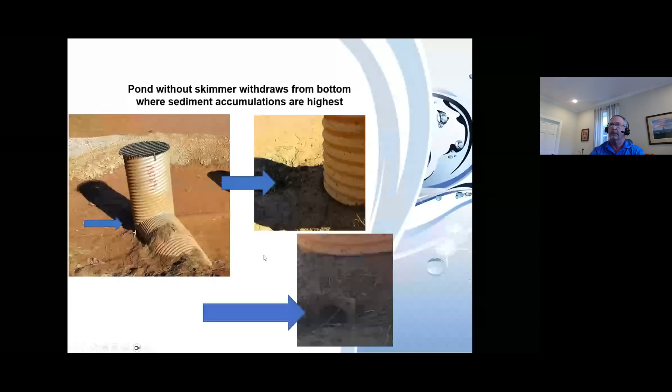Skimmers came around, they've been around probably 20, maybe 25 years now, depending on location. The idea is that it floats, it drains the pond from the top down, releases water from near the surface where the water's cleaner. It's not clean water by any means, but it is cleaner, and it gives more time for sediment to settle out and stay in the pond.

The Marlee Float Skimmer, our product, is a little different from some other products. We don't take water directly off the surface, we take it from just below the surface. The main benefit is that any floating trash or debris, even if you had an oil or diesel spill during construction that got into the pond, doesn't get discharged through the skimmer. It actually stays in the basin.

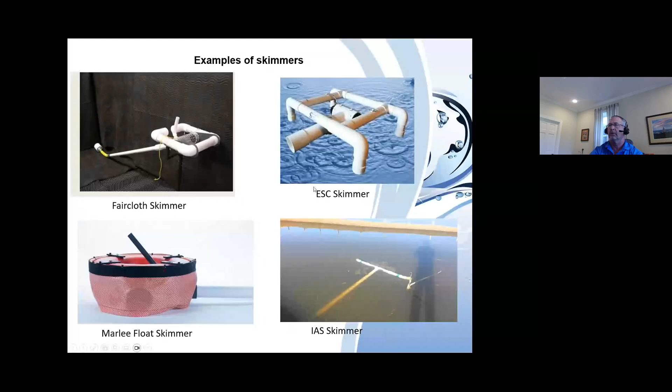There are a variety of skimmers on the market. The Faircloth skimmer kind of got this started. Mr. Faircloth out of North Carolina invented this maybe 25 to 30 years ago, I think, and it's really become one of the more common products. You have the Erosion Supply Company skimmer, the IAS skimmer, and then obviously the Marlee Float, which looks a little different than the other guys.

So there are three fundamentals on sediment basin design, just to keep this simple. Number one is basin volume. The basin volume is based on the area flowing to the basin, and requirements do differ from area to area. What we see in a lot of states is a standard of either 1,800 cubic feet or 3,600 cubic feet per acre flowing to the basin.

Some areas also require basins to have a permanent pool or sediment storage volume that is below the invert of the skimmer. The important thing we really try to harp on is to use the required volume, not the actual volume, when you size your skimmer. The required volume is often much less than the actual volume of the pond, especially if that pond is going to be your permanent detention pond later.

Number two is dewatering time. Sediment basins work by simply allowing time for sediment to settle to the bottom. Depending on your soil type and conditions, that may vary as far as what you need. What we see as kind of the general standard is 2 to 5 days, or 48 to 120 hours, but again this varies state to state and even sometimes within MS4s within the state.

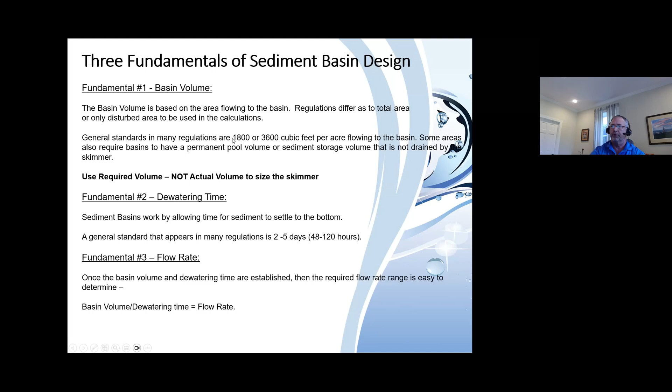Once you've got those two, you want to determine your flow rate. So fundamental number three is determining the flow rate for the basin - simply the basin volume divided by the dewatering time gives you that flow rate. Now, since dewatering time is typically a range, that flow rate has a range as well. We recommend that engineering consultants, when establishing that flow rate and going through the review, establish that range, so you're not trying to hit an exact time.

Skimmers aren't super complicated, and a couple hours one way or the other is probably not going to make a big impact on the amount of sediment being trapped. So we recommend using that range of time when you specify it.

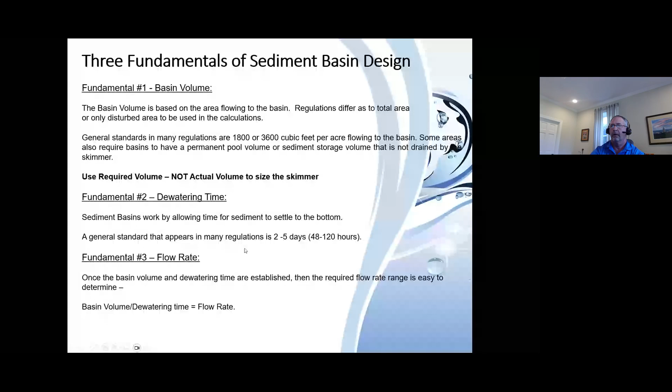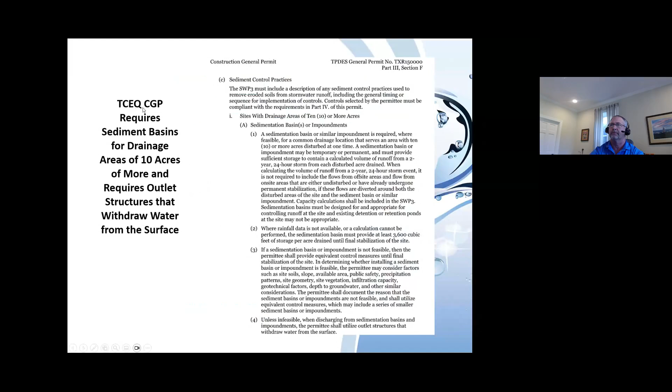I'm going to go through a couple of state standards just to give you an idea of how they vary. Texas is one state we're now seeing coming on, where skimmers are just now starting to be required. The Texas Construction General Permit, from the State Environmental Quality Agency, requires sediment basins for drainage areas of 10 acres or more, and they do require outlets that withdraw from the surface.

This is from the Construction General Permit - again, must provide sufficient storage to include a calculated volume. They say you can either do a 2-year, 24-hour storm and calculate that based on the rainfall for your area, or provide at least 3,600 cubic feet of storage per acre drained. And then most CGPs include language like this: unless infeasible, when discharging from sediment basins and impoundments, utilize outlet structures that withdraw water from the surface, i.e. skimmers.

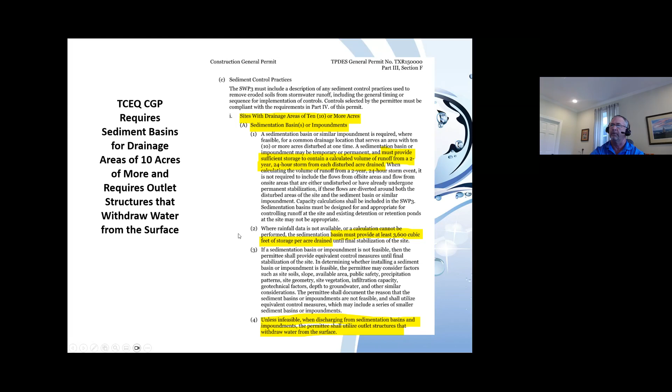Examples of infeasible - really the only one we've seen is frozen conditions. So if you're in a state or area with significant freezing, skimmers may not be the best choice during that time. What we recommend is to use the skimmer most of the time and maybe have an alternate outlet, like a perforated riser that you can cut on and off with a valve, to address those frozen conditions.

Typically they'll have guidance on sediment basins. In Texas there's an ISWM technical manual that goes into much more detail about all the key requirements for sediment basins, and typically has some diagrams and charts to show you what they want in that particular area. Another example is Alabama - Alabama gets a little more detailed than Texas.

In Alabama, they have 2 different handbooks for erosion control, sediment control, and stormwater management. Combined, they're the Blue Book, Volume 1 and 2. Volume 1 has more of the plans and design practices. Volume 2 talks about installation, maintenance, and inspection for those practices.

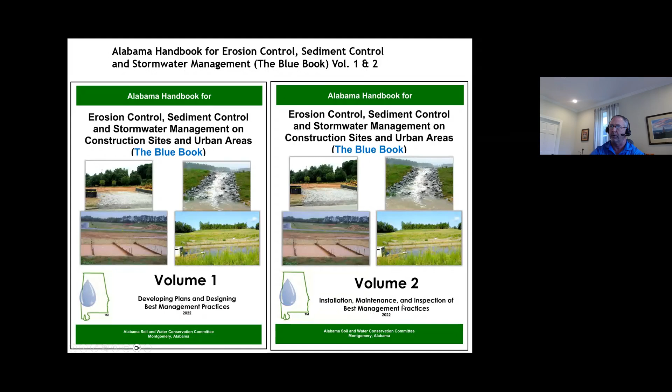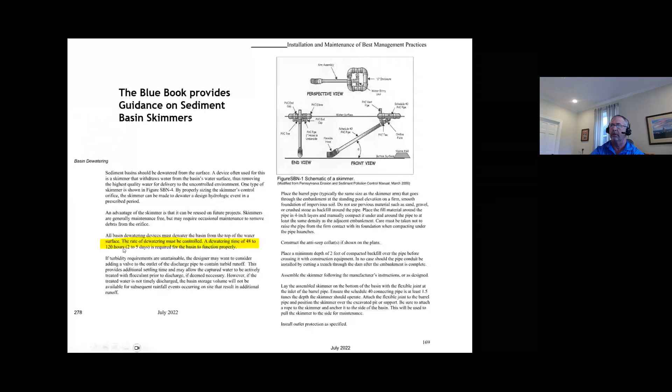In the Blue Book for Alabama, they give details on sediment basins and go through the key components. They go into detail about skimmers in the Blue Book. They do specify a dewatering time of 48 to 120 hours for the basin to function properly. And then they've got a little chart that tells you the other criteria.

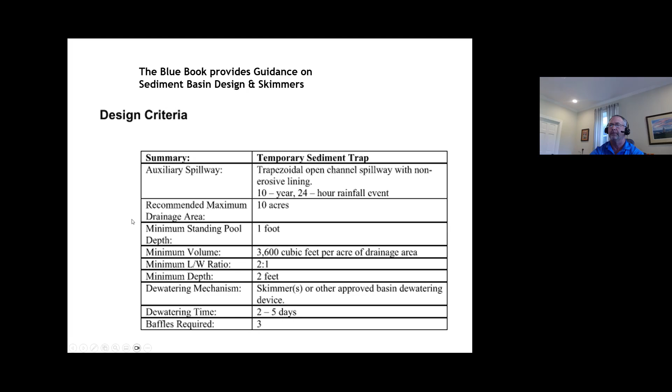I'm not going to go into those in detail, but it does spell it out for you as the design engineer what you need to do. One thing to point out, Alabama DOT does have an approved list of skimmers that they allow, and our skimmer is on that list. So if you are in Alabama, good to go to use us there.

This is kind of a quick chart just to give a summary and show how some states differ. In this case, I just picked Texas, North Carolina, and Alabama to use as examples. Texas, again, 2-year 24-hour storm or 3,600 cubic feet per acre.

North Carolina calls it out as 1,800 cubic feet per acre of disturbed area, so not total area. So they do recommend you try to divert undisturbed area around the basin. And then Alabama is also that 2-year 24-hour storm or 3,600 cubic feet per acre.

Some areas specify a surface area for the basin. Texas does not. North Carolina and Alabama use this formula of 325 square feet per CFS of the 10-year storm. They typically require the principal spillway to be their 2-year or 10-year design. That principal spillway is going to be your skimmer, and typically if you have a riser structure in there, the top of the riser would be included in that.

And then you typically would have an emergency spillway for larger storms. That's going to vary from the 25-year, 10-year, or in some cases 100-year storm. And then where skimmers are required, it also varies. Texas looks at big sites, 10 plus acres. North Carolina wants it for anything 1 acre or larger. Alabama says when necessary - so if you can't meet your trapping efficiency requirements with other means, then you need a sediment basin.

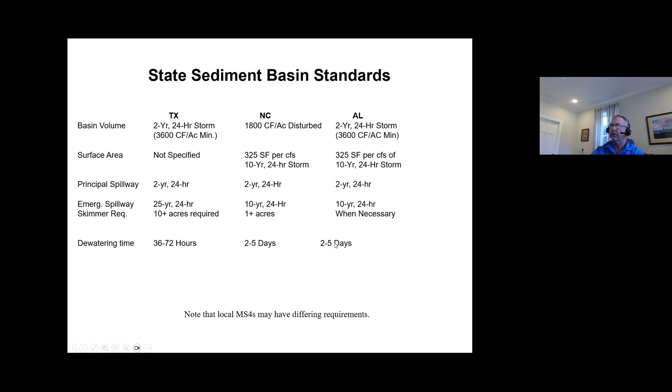And then the last one is dewatering time. Again, the 2 to 5 days is the most common standard we see. Texas says 36 to 72 hours.

One of the big things about skimmers that we like to educate folks on is that skimmers have long been assumed to be a constant head, constant flow dewatering device, which does make sense because they float and have pretty much the same head constantly in the basin. However, testing has shown that's not necessarily the case. This chart comes from a study done by TRI Environmental for Alabama.

The flow rates here go from 1 foot of depth to 4 feet, and they looked at 3 different 3-inch skimmers. They don't tell us the brands, but let's just say it's 3 different types of 3-inch skimmers. At 1 foot, 2 of the skimmers are pretty close, at 37 GPM. The other one is at 70, nearly double that flow rate. As they go up, all 3 skimmers have an increase in flow rate, roughly 25% from 1 foot to 4 feet. Again, 2 of them are pretty close, a little above or below 50 GPM, and the other one's about at 90.

So the main point here is if you just say 3-inch skimmer and you don't give more information, you may or may not get what you really intended. You may get one, if you intended to have the 90, you may get one that flows half. If you intended to have the 50, you may get one that flows double. So it's important to specify flow rate when you're specifying the skimmers for your basin.

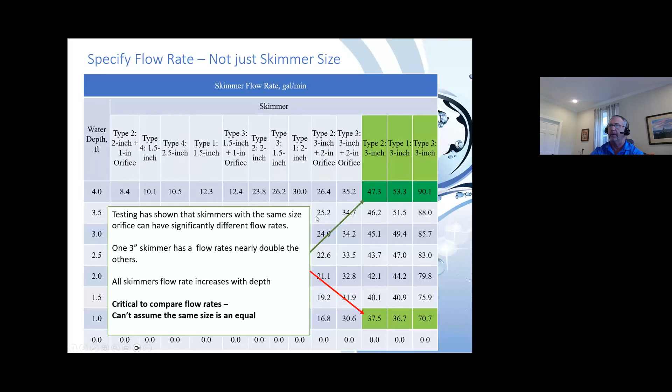We offer several tools on our website. They're pretty easy to download, but this is our basin design tool.

It lets you plug in your date, project name, engineering company, basin description. If you need any other information, you can put it in. So maybe it's like a phase 1 basin, and then you're going to convert it for phase 2 differently.

One thing we do is we have a check here for the required dewatering volume. You're going to look at that area to the basin, whatever acreage that is, times the cubic feet per acre required for that area. In this case, I'm using 1,800 cubic feet per acre. It's 7.5 acres, so our required volume is 13,500 cubic feet.

Now over here is where you're going to plug in your basin, and this tool does factor in that curve and the flow rates. First thing you're going to do is specify that range of time. Again, we've got 48 to 120 hours, so 2 to 5 days.

Pond depth is going to be the depth required to achieve that required dewatering volume. So if your sediment basin is going to be your detention pond later, you don't want to say it's 8 feet here because that's going to calculate the pond volume to be much larger than required. You want to use a depth that's required to achieve the required dewatering volume, then put in the top length and width and bottom length and width.

Now I realize there are very few, if any, square or rectangular basins out there. So use your engineering judgment, tweak those numbers so that the calculated pond volume is, we try to say, within 5%. Again, you're shooting for a 2 to 5 day range. You don't necessarily need to go back here and go 120.23 feet to try to get this thing to hit exactly that required.

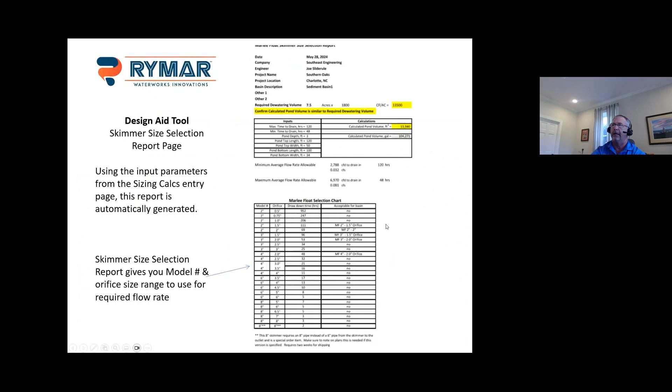When you do that, this tool will calculate for all of our skimmers with each orifice configuration what the flow is. Down at the bottom there's a skimmer report page tab. You click on it and it's going to take you to this nice neat 8.5 by 11. The top side of this is going to give you all your input information.

It's going to tell you the minimum flow rate based on the maximum time and the maximum flow rate based on the minimum time. So here's your flow rate range again that you're creating. It's got this check, so it highlights for the reviewer, hey, yes, our calculated pond volume is just slightly more than our required volume.

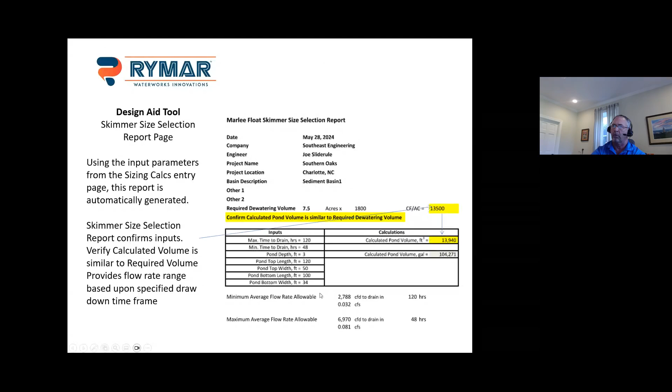And then because it is our tool, it's going to tell you the drawdown time for every one of our skimmers, and based on your range that you specified as acceptable, which skimmers are acceptable. We typically recommend that you shoot for that 2 to 3 day drain time, depending on your site.

If you've got really coarse soils, they're going to settle out quickly, maybe you want to lean more towards the 2 day. If it's really a lot of silts and clays that'll be suspended, maybe you go to 3, a little more. But in this case, you've got a variety, 5 different skimmer orifice combinations that would meet that spec.

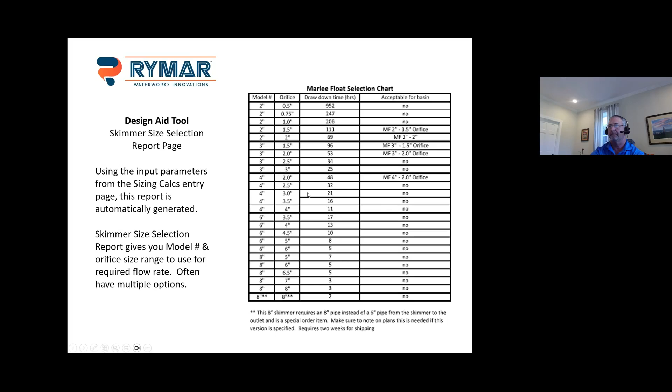We also have some basin details on our site. We have 4 different details for this. So we have details that have a riser structure, which would be more of a multi-use basin that's going to be converted to your pond later.

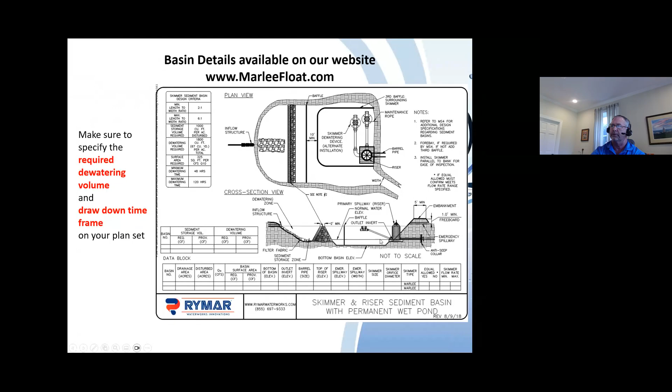We have versions with a wet setup, so they have a permanent pool here that's below the invert. And then we also have ones that are set up for temporary, so maybe it's just a barrel through the dam and a spillway, and it's going to come out as a temporary basin.

We have sediment design criteria over here. So length to width ratios are common. As far as requirements, minimum volume, you specify that, surface area if it's required. And here's where you set your minimum and maximum dewatering time of, again, we've got 2 to 5 days.

Down here at the bottom, we have a data block, and this would be for each specific basin. So you'd have a drainage area to it, disturbed area to it, the flow rate, again, your basin volume, the required and provided, basin surface area. Again, you want to make sure that your provided meets your required.

The outlet invert, pipe barrel size, that'd be your pipe through your dam, emergency spillway elevation here, and then skimmer size, skimmer orifice diameter, skimmer manufacturer. Is an equal allowed, yes or no? Most of the time that's going to be yes, but there may be some certain circumstances where you say no.

And then skimmer flow rate. Here again, you're establishing that minimum and maximum. Now, because skimmers are used in sediment basins, they're typically one of the first things to go in on a construction site. So if your contractor's getting started and says, hey, I've got this skimmer left over from a previous job, can I use it here on this basin? It's pretty quick to check whether that skimmer falls within the range of flow rate specified. So hopefully that's a shop drawing review and not a full scale resubmit through the permitting process, because you probably don't have time for that in most cases.

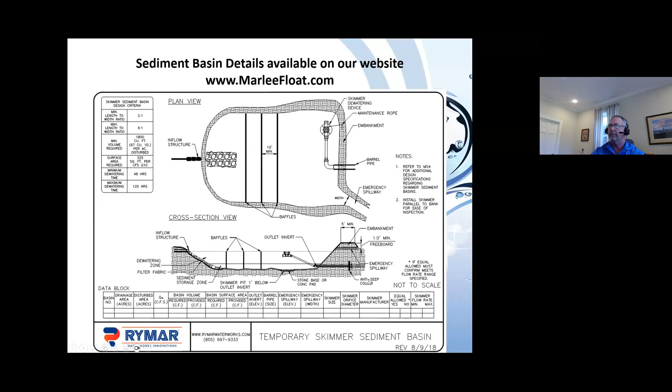We also provide details of our skimmer. What we have here is just a typical detail. One thing to point out about ours is we have this orifice plate. Some skimmers come with a disc that you cut to within a tenth of an inch or so to hit a precise flow rate. Our design is a little different. We provide standard orifice sizes. Each skimmer is going to have 4 or 5 different combinations, and you just select which one of those standard sizes falls within the flow rate range required.

One of the other common questions is the pipe between the outlet structure and the skimmer. How long should that be? We recommend 1.4 to 1.5 times the height of the outlet structure. That will allow the skimmer to float at essentially a 45-degree angle when it gets up to the max height of the outlet, so it's easy for the flexible coupling to bend there and maintain that. You typically don't want the skimmer floating up at a 90-degree angle. Things start to get kind of wonky when that happens. So that 45 degrees is a good guideline.

Many of you have probably seen skimmers in basins. This is one I like to point out. The contractor, I think, did a pretty good job here. We've got tracks in on the side slopes, so obviously they haven't seeded or grassed yet, but it looks like they're probably getting ready to do that. They've got their coir fabric baffles in, so that's great. One thing I like to point out here is the stone pad. Ideally, we'd like to see this depressed. This looks to be a dry basin. It has a minimum amount of storage below the invert, but it's going to be hard to get it dry because the skimmer is going to be sitting up 6 or 8 inches. The details typically call for that, and contractors sometimes don't do it, but we'd love to see that pad depressed a little bit to help drain as much water as we can out of the basin.

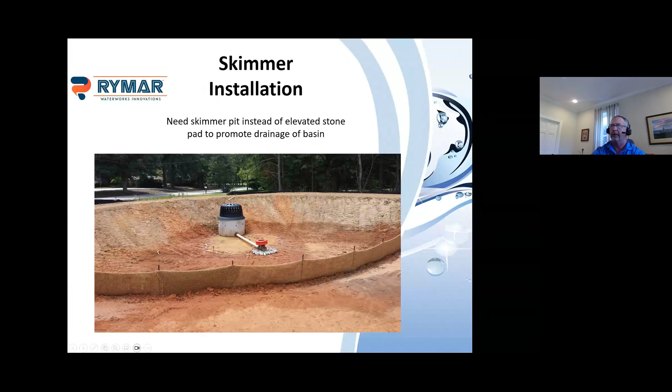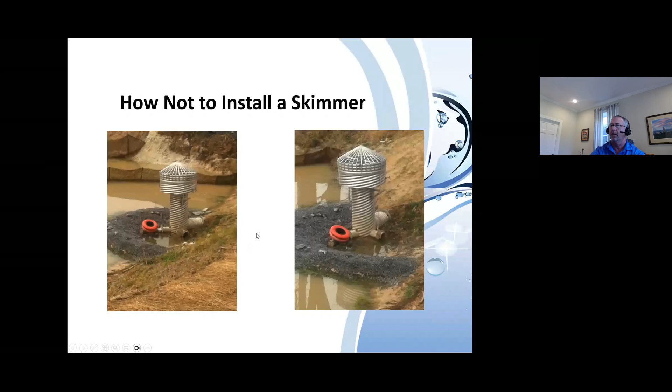Now here's one of the worst installs we've ever seen. This came from an inspector who sent it to us, and they were laughing, but there's no flexible coupling here. I'm not even sure exactly how that's attached. Obviously the pipe's way too short, nowhere near 1.5 times the height of the structure. If you look close, the outlet on this side, this valve's open, but most of the water is bypassing anyway. So we have seen some poor installs. We've seen 1 or 2 that have been installed upside down - they actually have a sticker that says 'this side up' - but anyway, things happen. Again, this pipe's obviously way too short, so this is not going to float very well. I guess the good news is it's going to drain the pond for the most part because it can't float up.

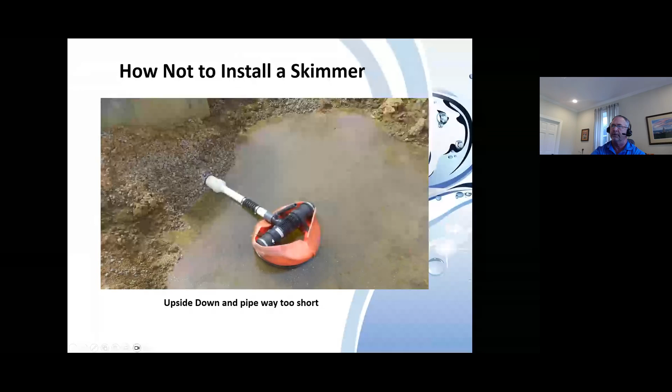Do like to point out, skimmers are not maintenance free. Like most things in stormwater, some maintenance is required. This is one on a project site we did engineering on many years ago, but it had vegetation growing out of the skimmer. So if you see vegetation coming up out of the skimmer itself, there's probably a problem. In this case, there was a pretty big root ball in there, and the pond was staying full because water couldn't get out.

So that's the basics on skimmers for construction. Now we're going to pivot over and talk about permanent use of skimmers.

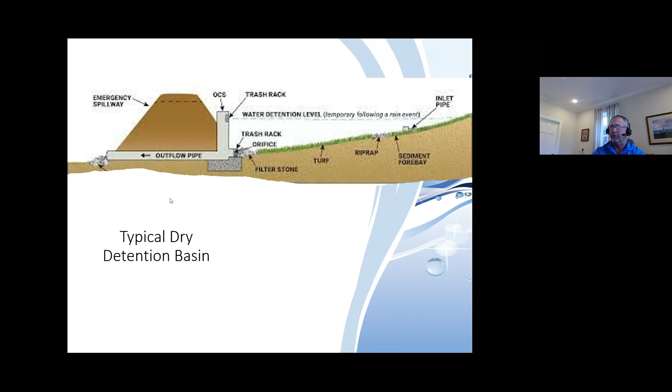So this is our typical dry detention basin schematic. Typically, once construction on site is stabilized, the skimmer is going to get removed. We're going to put a low flow orifice, installed at the bottom of the riser, sized most likely to release a first flush volume or whatever that low flow event is that you're required to handle.

Typically you're going to have some sort of guard or filter here. Now keep in mind that for water quality in ponds, typically what we're trying to achieve is hold water in the pond long enough to let whatever sediment or pollutants settle to the bottom. So we're settling them out, but then we're pulling that flow from the bottom where that pollutant or sediment concentration is the highest.

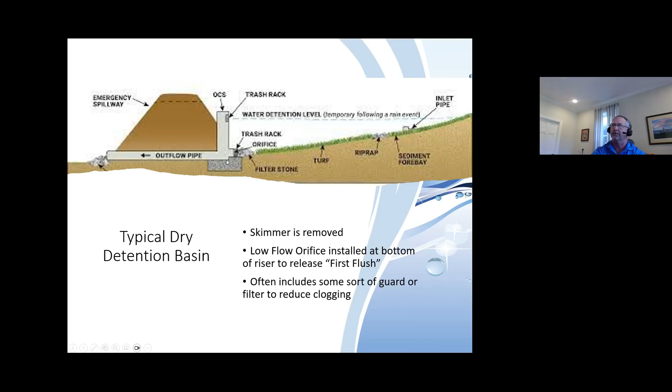Skimmers, on the other hand, take water from the surface. These basins rely upon natural settling of sediment particles. The forebay is going to take some out, and then as they travel from the inlet to the outlet, you're going to see it continually drop down to the bottom of the pond. So if we release that water from near the surface, it's cleaner, and we let cleaner water out of the pond and give more time for the mud to settle.

So this has become a standard in construction, and it just makes common sense to consider using that same standard post-construction, for a lot of the same reasons it works so well during construction.

So one example of this, we did a pilot project. This has been our kind of playground for the last 10 years, just to show how skimmers can help with maintenance. This doesn't really focus on water quality, although I know it does increase water quality, but from a maintenance standpoint. This was a pond that received a notice of violation, and it had not been maintained in probably 20 years.

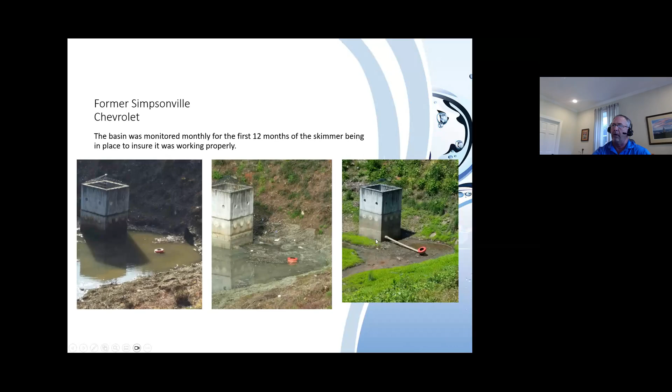So we ended up redesigning the pond and installing a skimmer. I'm going to skip over this picture. If you look at this last photo, you can see the skimmer outlet here, and you can see where the old orifices were. We actually closed in these old orifices and put in new ones. What we found was a 2-inch outlet 6 feet below the now bottom of the basin - it had accumulated that much muck, debris, and sediment over the many years of not being maintained.

Instead of cleaning the pond out, which was going to be extremely expensive, this was a rare pond that actually had excess volume in it. So we redesigned the pond and changed the outlet structure, and instead of going back with a 2-inch orifice, we got the county to approve putting in a skimmer. This was the first time a skimmer was allowed for permanent use in this particular area, and they required us to monitor it for the first 12 months to make sure it worked properly.

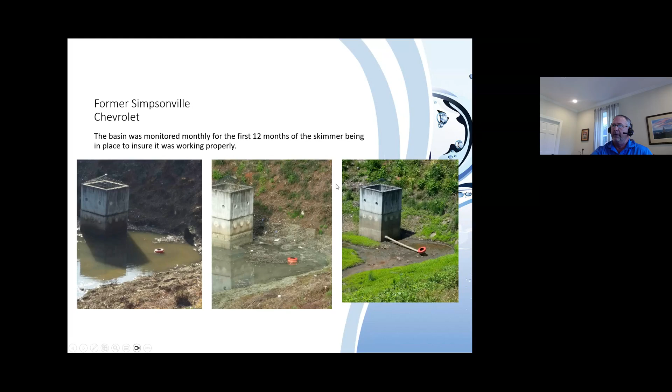So we did that, and results were very good. About a year later, the then-owner decided to keep the pond maintained, so his landscapers were out there and cut all the vegetation. This pond is about 3/4 of an acre, with side slopes about 1.5 to 1.

So they had cut everything, let it all fall to the bottom, and then a big thunderstorm showed up and dumped 5 inches of rain in probably 4 to 5 hours. All the junk and debris that had been cut was pushed down to the outlet - but you see the skimmer sitting here. Imagine if this was a 2-inch orifice plugged in there - it would have surely gotten clogged by that debris. Instead, the skimmer was able to drain it down.

This kind of gives you a better feel - this riser is about 8 feet tall total. So if a 2-inch orifice down here got clogged and water was sitting up at this level, you're talking about a pretty dangerous situation to try to get in there and unclog it. And don't forget, this pond was originally 6 feet deeper, so the inside of this riser goes another 6 feet into the ground. Getting up to the top of it and climbing down in would be a real challenge as well.

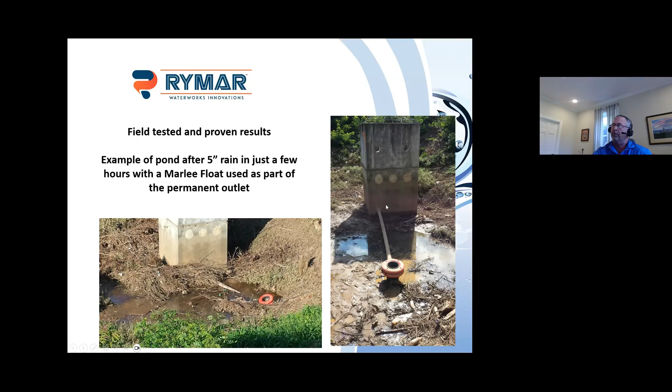So if you're going to consider using skimmers for post-construction, we have to know how to model them in our software. Hydraflow is probably the most common hydrology modeling software, at least that's what we tend to see, and now that it's built into Autodesk, most engineers seem to have that.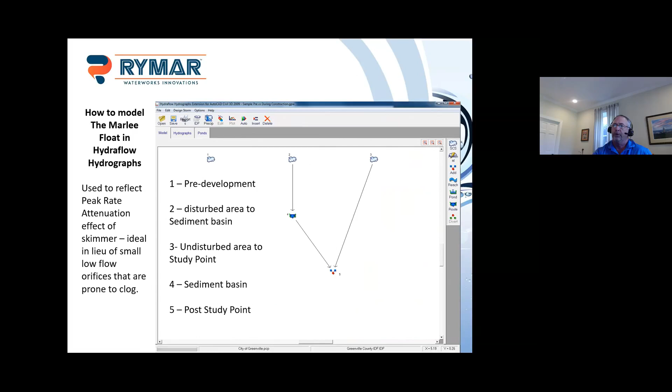So this is a sample site that was done several years ago. It was done in an area that requires quantity control during construction, so pretty good example of pre and post rates with the skimmer.

So this site was about 5.5 acres. 3.4 were being undisturbed, but they were still flowing to our outlet, to our pond. About 2.25 acres is being disturbed, going to a small sediment basin, and then it's discharging across this little side road, and there's a catch basin on the other side of the road that we're discharging to.

So, just from a liability standpoint, we didn't want to increase the flow going across the road, and so we do want to have detention in our basin.

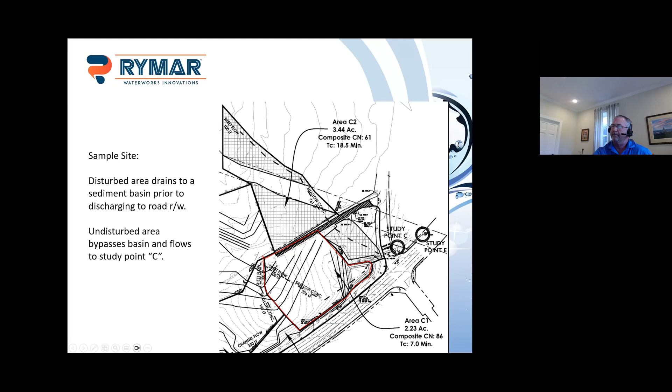So in Hydraflow, we set up our pre-development first. So we did 5.5 acres. It was a wooded site, curve number 59, time of concentration about 18.5 minutes. In this area, we used a type 2 storm event.

Post-development, the 3.4 acres is undisturbed, basically the same criteria. The disturbed area, 2.25 acres, we used a curve number of 86. That's for basically disturbed earth, bare earth condition with a time of concentration of 7 minutes.

What you're going to do when you do Hydraflow, this is one of the important pieces, is you need to enter storage at each contour to include data points so you can enter the skimmer flows. So you're going to basically create stages here that will allow you to enter the flow for the skimmer at each stage when you do your outlet structure.

So in this case, we started at 0, and then 0.1, 0.3, and 0.5, and then every half foot up to 4 feet. Now again, this is our example. If you want to do every foot and you feel like that's going to generate your flow rate curves sufficiently, it's up to the engineer on how to do that.

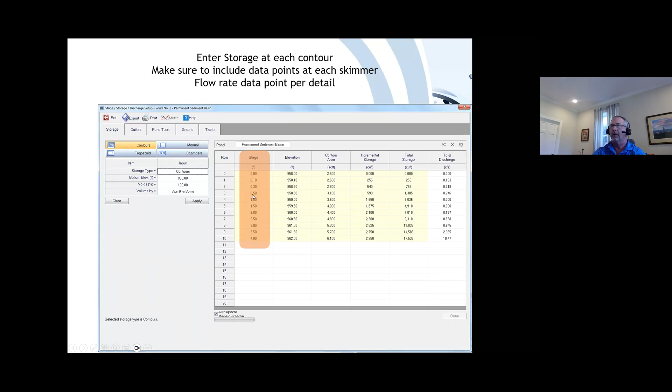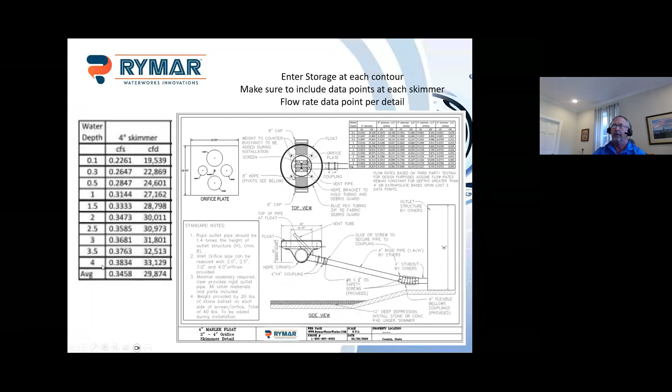Because on the details, we provide you with the flow rate at 0.1, 0.3, 0.5, and then every half a foot up to 4 feet. It was 4 feet because the test tank was 4 feet deep, so that was the max they could go.

And then you're going to build your outlet structure. So you're going to put in your barrel. In this case, we had an 18-inch barrel going out of the pond. Bottom of the pond, invert elevation is 958. Small pond, but complicated structure.

So we had a 6-inch orifice, 1.75 feet above the bottom of the pond. Had a riser structure that was 3.6 feet tall. And we had a rectangular weir 1 foot wide at 3 feet above the bottom of the pond.

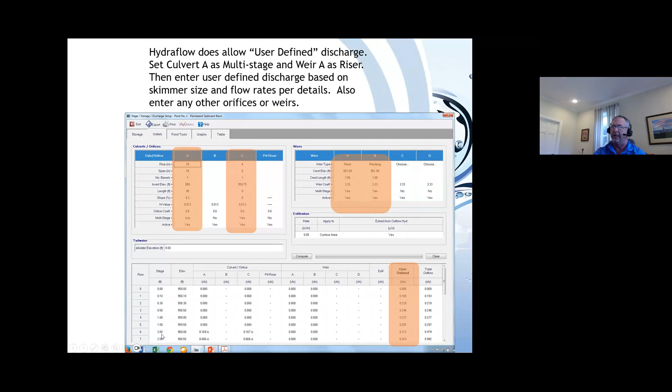And then to build in our skimmer flow, we use the user-defined column here. So again, you manually enter the flow rate off the detail at the stage to create that user-defined flow rate curve for the skimmer.

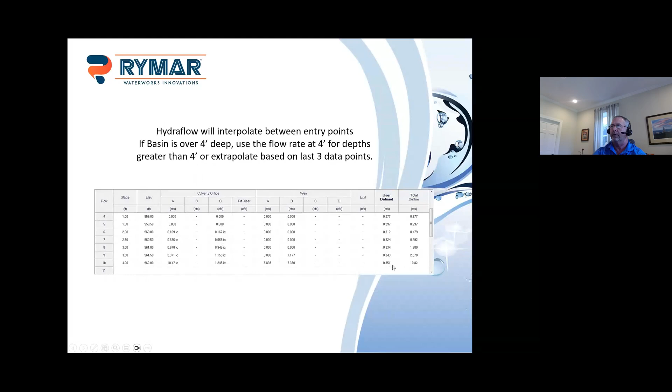What you'll see, well, if your pond's over 4 feet deep, you've got a couple of different options. One, you can just maintain that flow rate at 4 feet. Number two, you can extrapolate it based on the last couple of points. Or if you really want to get complicated, you can go back to our design tool, plug in the actual depth of your pond, say 8 feet.

We're going to then break that 8 feet into 20 different increments, and we're going to give you the flow rate at each increment. Now in this case, the sample here is showing our 2-inch skimmer with a 1/2 inch orifice, so the flow is very, very small, so it really doesn't change much over that.

But larger skimmers, you're going to see a change, a more dramatic change, from that 4 foot to 8 foot level. And you can then plug in these data points, entry points in your stage pond design.

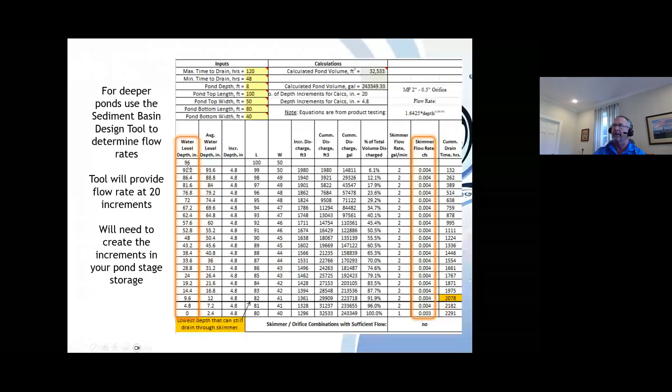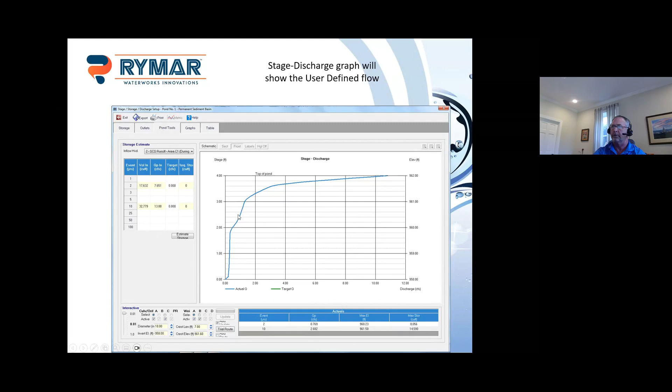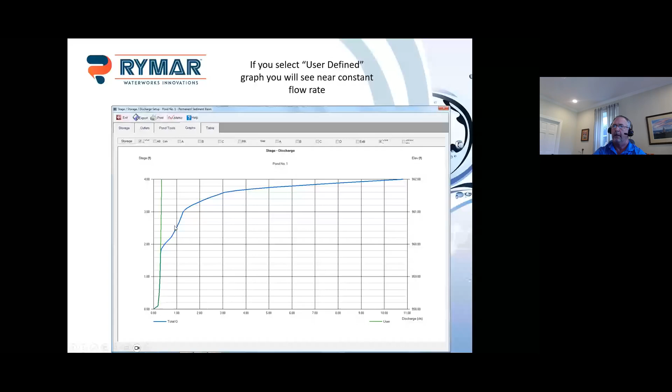But if you look at your stage discharge curve, obviously you've got flow starting at 0 and going out. So that's the skimmer flow, and then your 6-inch orifice, your weir, and your riser. And then if you can see this little green line, that represents the flow from the skimmer. So you just have a slight increase from 0 to 2 feet deep, and then the other orifices kick in.

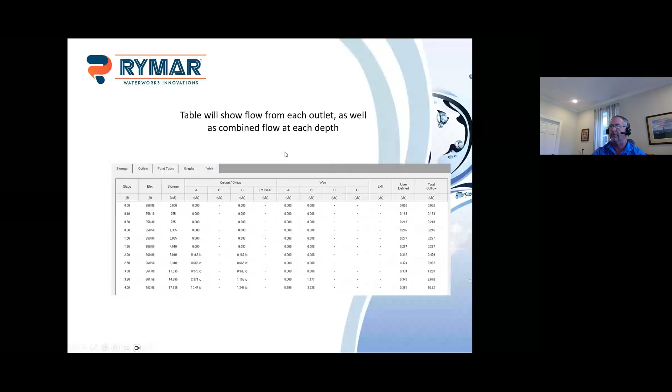And then if you just do a double check, look at your flow table - your total outflow is going to be equal to your user-defined flow until you get up to where the other orifices kick in. In this case, we hit 2 feet and we see now the 6-inch orifice has kicked in, and as you go up, so on. So that's a quick way to show how you would model that in Hydraflow.

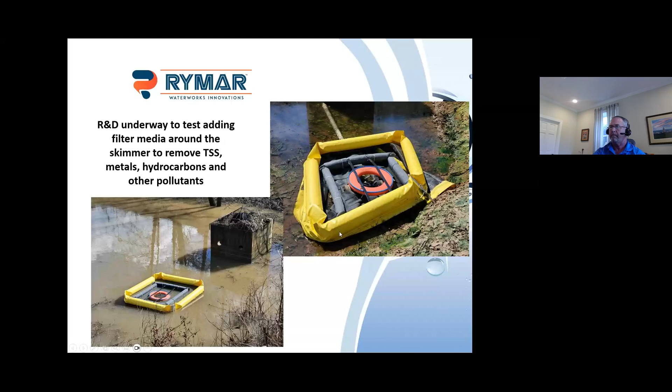We had this prototype in the basin for about 2 years to test and see if this would work. This was probably our 5th or 6th prototype - a lot of the early ones, the filters just weren't big enough to keep up with the flow rate of the skimmer. But you can see in this picture on the left, the turbidity in the main pond is noticeably higher than the turbidity at the skimmer. And this is an actual picture of the outlet here - pretty clean water. I wouldn't recommend drinking it, but relative to what's coming in, that's pretty clean water coming out.

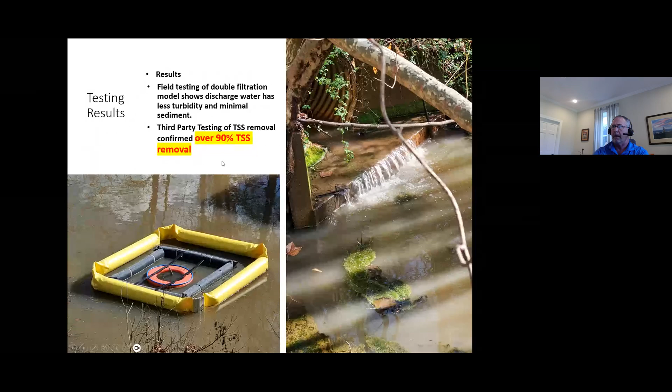So now what we did is we had third-party testing - we actually used TRI Environmental to do our testing for us. This system of the skimmer with the filters was tested to ASTM standards and shown to meet over 90% TSS removal. One thing to point out about our testing - we tested 2 versions of our skimmer. The ASTM standards require you test two versions, and the flow rate of one has to be nearly double the other, so you have a wider range of flow rates. ASTM C1746 is the standard - it's relatively new, a standard for sediment retention devices.

The tank was set up to minimize the effect of the pond by introducing sediment-laden water within 2 feet of our filter. What we wanted to do is avoid saying, well, how much of our percentage is from the forebay, how much is travel distance, how much is whatever. We said, what is this system - if we put in our sediment-laden water, with that gradation of sediment specified in the ASTM standard, right at our skimmer or at our filter, and let our skimmer pull the water through the filter, what kind of results do we get? The other thing is this filter is about 3 feet deep, so our test tank was about 4 feet deep, so water could come underneath the filters - but the idea is that gravity then does the work because there's not enough flow rate or force to pull that flow and sediment particles up to the skimmer to be discharged.

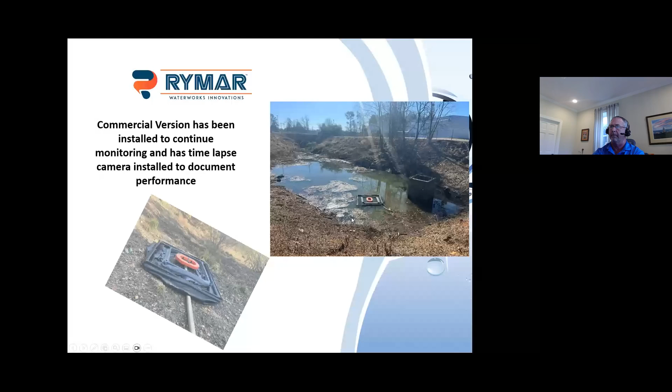So now we go back to that pond. Again, this gives you a better feel for the size of the pond and the side slopes we talked about before. We've now got our commercial version installed there, and we're monitoring it with a time-lapse camera. The outside here is just a Mirafi 402 fabric, a polyethylene fabric.

It acts as a screen, and then the inside again is our non-woven. It's a material called Adsorb-It, which has properties to absorb hydrocarbons, help with TSS, metals, and hopefully eventually we'll test to see if it helps with other pollutants such as nitrogen and phosphorus. Currently we've only tested this for TSS. Adsorb-It has a variety of other tests for pollutants of just the fabric itself, but not in this system.

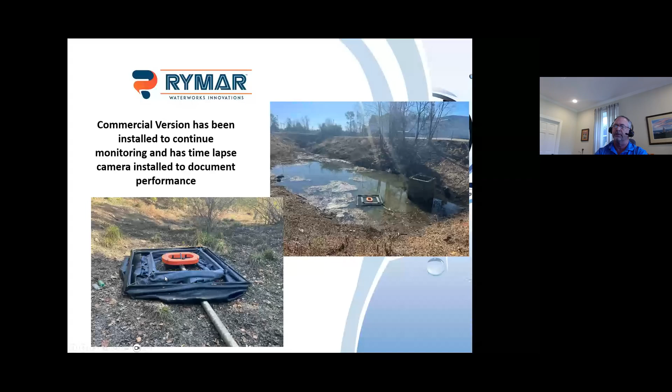So I want to talk about the benefits of filtration versus settlement when doing a pond. First, the peak rate of discharge from your basin. If you're doing filter treatment, you can establish that filter treatment flow rate up to the first quantity storm event. So let's say in your area, the quantity control requirements are that you control your pre and post for your 2-year storm as the first storm. Well, if you can have a filter that handles up to the flow rate for that 2-year storm, you can now treat up to that 2-year storm event.

The filter treats 100% of the runoff from storms up to the peak rate of the filter. Why is this important? Traditional pond design with a first flush volume is typically like a 1 inch, maybe 1.5 inch volume over the site. You size your orifice to let that volume out over a specified time, say 24 to 48 hours. But what happens when you have a 1/4 inch of rain or a 1/2 inch of rain over 8 hours? You're still washing off all the pollutants from the parking lots and other areas, but getting very little ponding in your ponds.

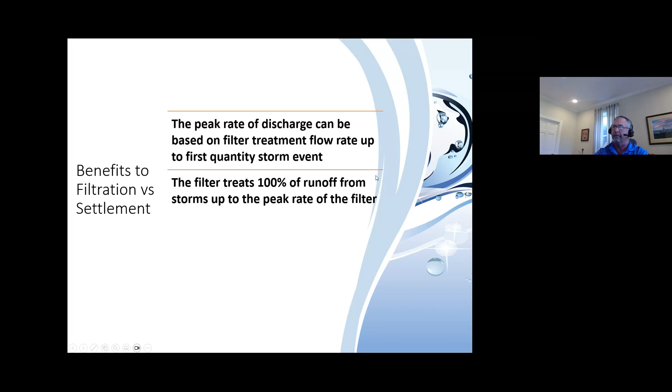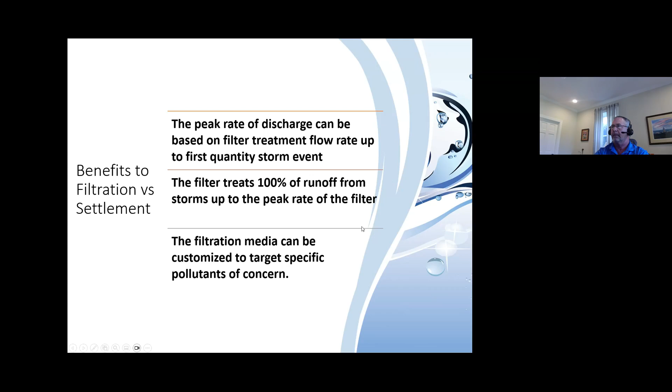And so, because all of our ponds typically rely on settlement to achieve water quality, you're getting very little treatment. The other thing is our filtration media can be customized to target specific pollutants of concern. We've already incorporated material that will absorb hydrocarbons. We see that as a pretty common concern. It may not be regulated, but it's still a concern everywhere, and we've already built that into our system.

So what are the benefits to using skimmers with filtration? We could just do a filter by itself in the pond, but then we're probably still going to be filtering the stuff at the bottom of the pond. When we use a skimmer, one, we can size it to control the peak rate for lower storm events. So depending on the size of the site, you may be able to select a skimmer that can be your quantity control for your 2-year storm.

The skimmer increases the filter efficiency by withdrawing from the surface where the water is cleaner. As the skimmer-filter combination floats up, you're now treating water that's cleaner than trying to treat the stuff at the bottom of the pond. And finally, the skimmer is fairly easy to access or pull to the side of the pond for maintenance and changing of filters. Obviously, maintenance is still required, but it won't require a confined space entry or vault access like other types of filtration.

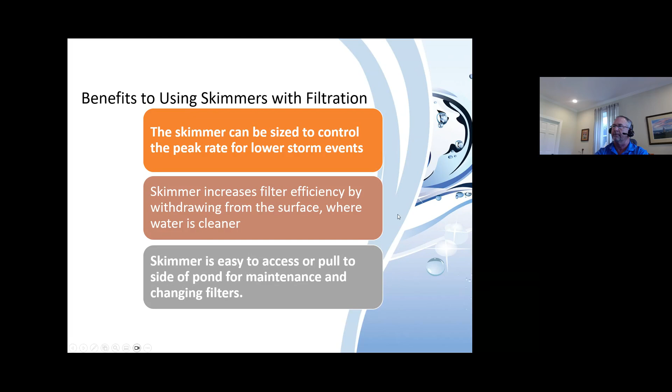But it's not a perfect system, so there are challenges. Number one, filters are prone to clog over time. They'll require some maintenance, potentially periodic cleaning. We currently recommend changing the filter every 2 years. In our prototypes, we really didn't clean, except for minimal maintenance during the first 2-year period, but we noticed it was still working, though we're starting to see some UV degradation after about 2 years, so we decided it was time to change the filters.

Number two, the skimmer's got to be durable. Earlier we showed a variety of skimmer types, and a lot of those are PVC. PVC is not going to hold up as well in UV long term.

Also, it's more susceptible to freezing, cracking, or similar issues in frozen conditions. Our skimmer is an HDPE product, so we do recommend using a skimmer that's durable and lasts. Ideally, you want a 20-year product out there.

And then finally, one of our biggest challenges is there are no established standards for basis of design and permitting when you combine a pond and a filter. There are some standards in many places for mechanical treatment devices or proprietary products. They'll rely on manufacturer recommendations, rely on third-party testing, go through different things, but it is not common to see those combined with a pond. Typically your ponds have standards and your devices have standards, but they don't necessarily go together.

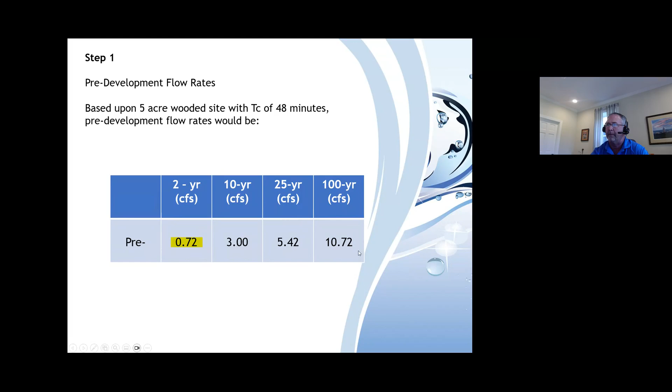Based upon the 5-acre wooded site, it's going to be 48 minutes for a time of concentration. Flow rate is going to be 0.72 CFS for the 2-year storm, 3 CFS for the 10, 5.4, 10.7. But again, we're going to focus here on the 2-year storm event.

Next thing we're going to do is look at our water quality volume and our post-development flow rates. Again, based upon that 5-acre commercial site, we're now going to assume a time of concentration of 10 minutes. What we want to do is determine what is that water quality storm event that would generate a 1-inch volume. That first flush volume is going to vary by state or MS4.

1 inch seems to be one of the more common standards, so I used it in this example. But if it's 1.5 inches, it's going to change that water quality storm event. So it's kind of trial and error in Hydraflow. I came up with a 1.73 inch 24-hour storm that would generate approximately 18,150 cubic feet of runoff volume.

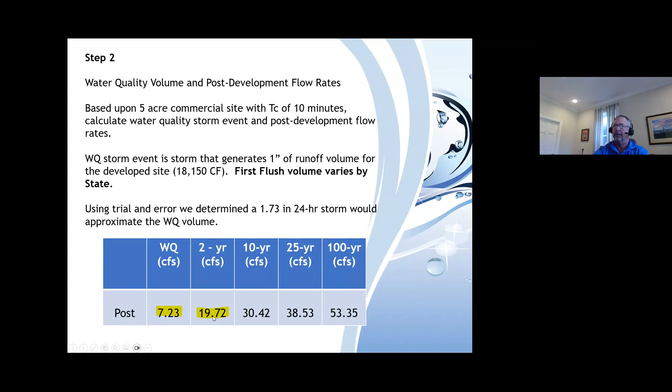So run that through the program, come up with 7.2 CFS for our flow rate for the water quality event, 19.72 for the 2-year storm. So that's a 19 CFS increase from pre to post in this example.

So this is going to vary. I know a lot of engineers have their own customized proprietary way to do this, but this is a spreadsheet that we see that's fairly common, used to determine what the orifice size would be for that first flush.

So again, we've got our first flush volume here. We're at 1 inch. We can use a dry pond. We wanted to release it over 24 hours. So it's going to determine what that average flow rate is, and we're going to average out the head on that orifice. And so we come up with a 2.6 inch outlet to release this volume over 24 hours.

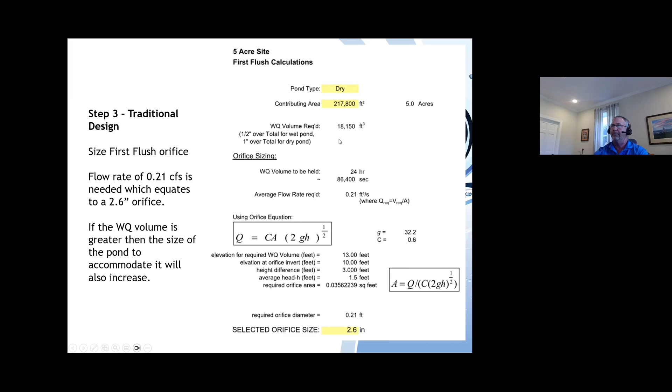Now, one thing to point out is one fallacy with this concept is it assumes that entire volume kind of magically appears in the basin instantaneously. Obviously that does not happen. There's a hydrograph of inflow into the basin that we see. It comes in slowly, typically has a peak, and then starts to drain out. So we're not really going to use 18,000 cubic feet of volume for that water quality event, but that's typically what we see as the standard when we go to do this.

So we run this through the model. In this case, instead of modeling a 2.6 inch orifice, because I'm not sure a contractor would get that right to put in—no offense to contractors—we're just going to make it easy and call out a 3-inch low flow orifice. We'll have some sort of trash guard on it. Then we'll have a 3-inch orifice at the 113, so basically 3 feet above the bottom of our pond, which correlates to the volume or elevation needed for a volume of 18,000 cubic feet in this hypothetical pond.

And then we'll have an 8-inch orifice 2 feet above that. That's going to control our 10-year storm. And then our riser structure is going to be our 25, emergency spillway for the 100.

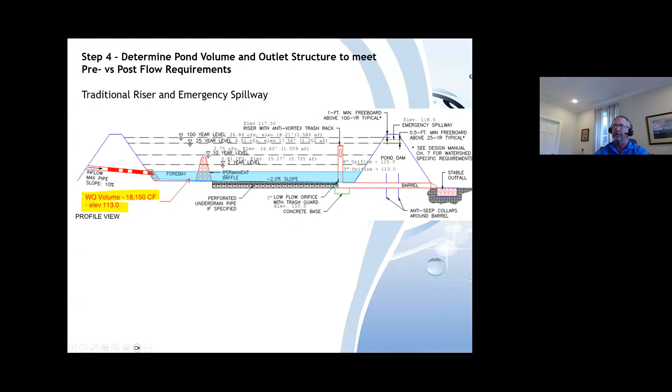So again, 18,150 cubic feet is this volume that's required for water quality in our design. However, if we run this out, we look at our peak flow for a water quality storm going out is only 0.25 CFS, and we're only using just under 10,700 cubic feet of volume for that water quality event. So it's hydrograph, water coming in, water going out. It wouldn't nearly use the full 3 feet of depth here or that full volume.

And our 2-year storm, we've got it at 0.81. Now, if you remember, our pre was 0.72. And so depending on your area and your reviewer, are they going to allow a 0.1 CFS increase from pre to post? Maybe, maybe not.

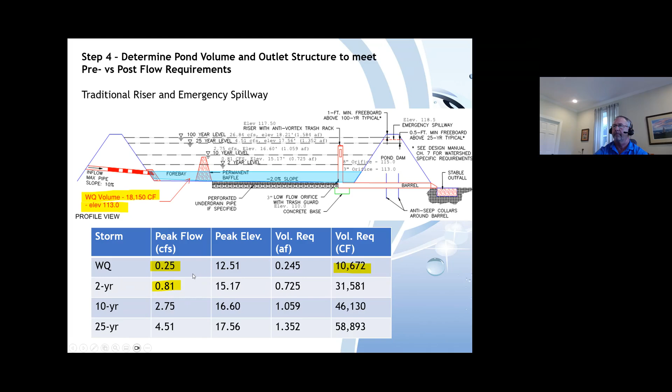But our 10-year, 25-year, we're detaining. And then if you look at this, your pre versus your post flows, again, water quality event, pre had almost nothing coming off. It's at 0.25, 0.81. So again, slight increase in the 2-year. 10-year, 25 are being detained, and 100 year is being managed through the spillway. And the storage required is here, and we'll just reference that for later.

So the alternate way to do this is going to be with the skimmer and then add the filter. First, let's look for a skimmer that would manage our 2-year storm event. In this case, we had a 0.72 CFS target for our 2-year. If we look at the options here, the 6-inch skimmer with a 6-inch orifice has a peak flow rate at a 4-foot depth of 0.78 CFS. So that's a good one to trial in the model here.

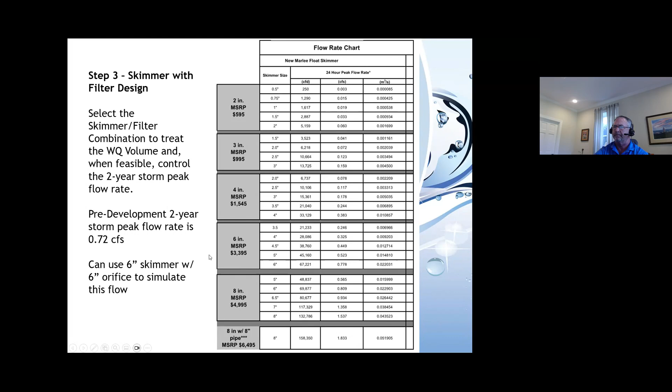So we also have details for the filters. One thing to point out is the filters are sized so that they keep up with the flow rate of the skimmer. So the filter's never going to be your controlling factor. It's always going to be the skimmer, so you don't have to model the filter in here.

Do pay attention, we have an L1 and L2. L2 here, we don't want L2 to be greater than about 20 feet. Really, we keep it down to 16. Because what happens is you've got a pipe here, and typically you don't want this more than 20 feet long, or you have to start joining pipes together, which creates some challenges. And as this skimmer rises in the basin to that 45-degree angle, this is going to be coming closer to your outlet structure. So typically, we don't want more than about 8 feet here to make sure we don't bump up against the outlet. Again, the filters are about 3 feet deep.

So they hang about 3 feet into the pond. And then you've got two different ones: the outer one, that's the Mirafi, and the inner one, that is the Absorb-it fabric. The table here gives you the lengths required for each. Do note that some of these get pretty long. Like for our 8-inch max, which has a flow rate of just under 2 CFS, that L1 on the outer is 46 feet, so you're going to have 23 feet in each direction. Typically that amount of flow would be a pretty large pond, so probably no problem fitting that in, but if you're doing the design, you do need to check that and make sure you've got enough room in your pond to actually fit the filter.

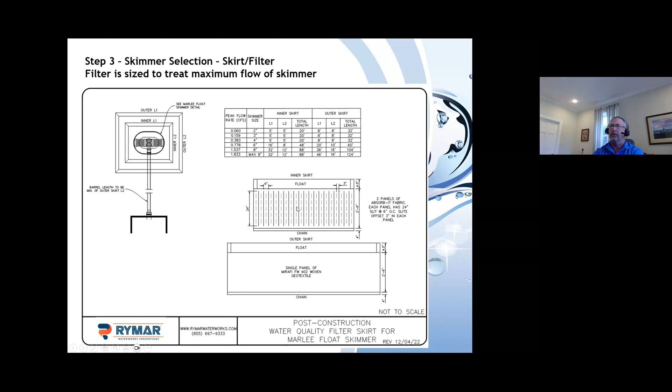One thing to point out, the filter sizes are based on scaling the flow rates from our testing. We looked at two things. One, assume all the flow goes through the filter itself, so there's a flow rate per square foot of material, and we maintain that. Then we said, okay, let's assume worst case, nothing goes through the filter and it all goes under, so what's the flow rate per linear foot for each one. We maintained both of those when we came up with our filter sizes.

Then we also have pond details. One thing to point out, you may have noticed in our previous details on our sediment basins, we showed the skimmer parallel to your dam. That was just for ease of maintenance - if you can tie a rope to it, it's a little easier to pull it over to the side.

For the permanent version, we're showing it sticking out into the pond. Some of these filters get pretty large, and what we don't want to do is get a filter hung up on the side of the bank. So we want to have it sitting not in the middle of the pond, but kind of out away from the bank.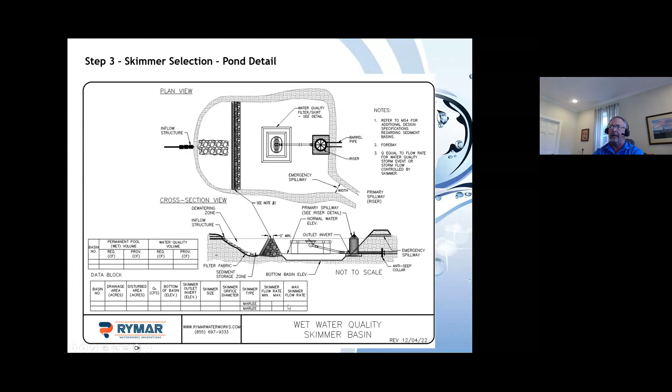And then you've got all your data that you're going to need for your basin design here. So now let's run that through our model.

What we're going to see is that our water quality volume is going through the skimmer, through the filter. It's now going out at 0.7 CFS. Remember, before it was 0.25. Our 2-year storm is now 0.78, so slightly less than the other model, but still slightly over that 0.72. And the 10-year and 25 are being maintained.

We're only using 7,600 cubic feet of volume. So we're taking advantage of the flow rate, and we're only using 7,600 cubic feet of this water quality volume, that would be 18,000 cubic feet under the first flush model. And you'll see there's also no other outlet until you get up to the 8-inch. So our skimmer is now our low flow orifice and controlling our 2-year storm.

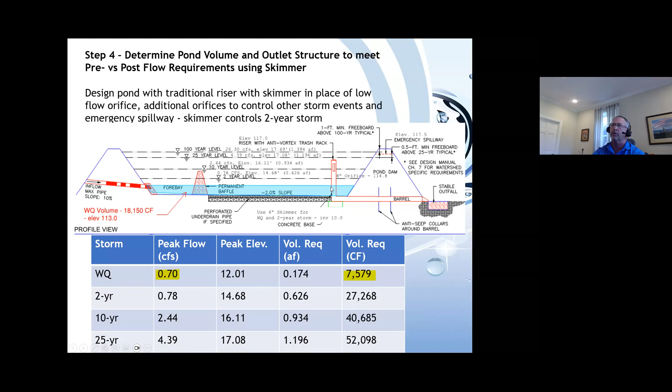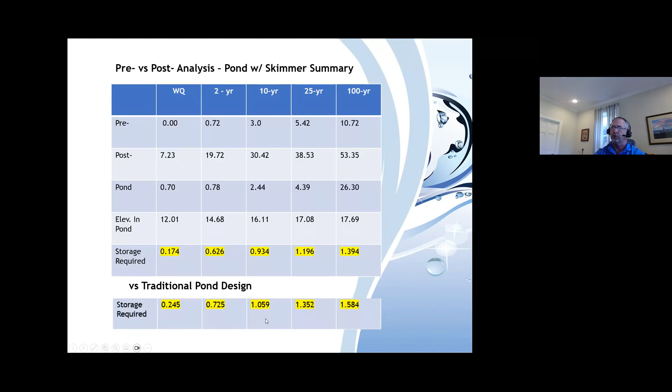And now if we compare this to the traditional design, so the pond with skimmer, here's the storage required for it versus the storage required for our traditional design. You can see these numbers are less, a little easier in percentage format. So 30% reduction in the water quality volume required using the filtration rate versus the volume-based rate, and 14 to 12% on the larger storm events.

So in summary, you are now using the skimmer filter, you're treating those low flow storm events, because even the trickles have to go through the filter to get to the skimmer to get discharged. You're treating the higher flow events. We're treating up to a 2-year rainfall, I think that's a 4.4, maybe 5-inch rainfall event in this area. So rather than treating just that 1.73-inch rainfall, you're treating all the way up to like a 4-inch or higher rainfall event. So much more of the annual rainfall is getting treated.

And then you are doing so with a smaller pond.

Any of you consultants out there, if you have a developer that's like, oh no, I want a big pond, let me know. I've only had one so far. It was down in a coastal area and they needed the dirt, so they were digging a bigger pond because they need the dirt. But by and large, we see anytime you can reduce the size of the pond, that's definitely something they want to do. And again, I would do a poll right now, but I can't do it on the LinkedIn side. But hopefully you just think to yourself, are you now more likely to consider skimmers for permanent use? I hope the answer is yes to that, and you will at least consider it as a tool in your toolbox.

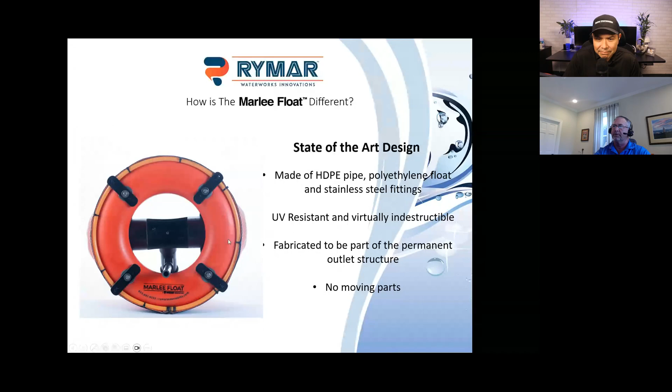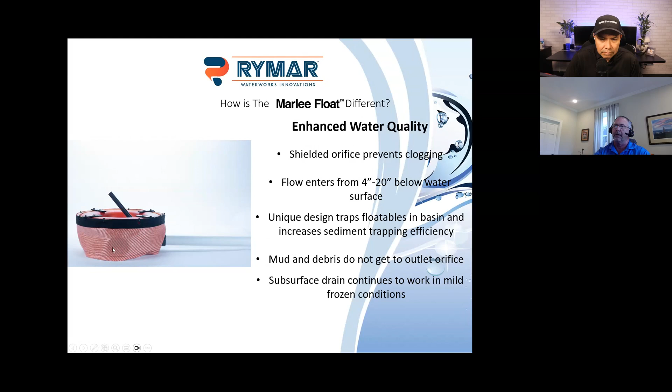Our skimmer, just a couple things about it. It's an HDPE product, it's very UV resistant, it holds up extremely well. It's got a debris guard on it, so it keeps floatables out, and it continues to work at least in mild frozen conditions. Now if you're up in, say, Cleveland, Ohio, and you get a foot of ice, you're just going to stop up, okay? Or if you're in northern Indiana, we've got to consider some options for frozen conditions. But in most of the country, it'll take in water from about 4 to 20 inches below the surface, so it's going to continue to work in most conditions.

I mentioned our orifice plate before, just a little quick video to show how that works. So just a piece of EPDM rubber goes in there. We've got this little metal nub here that helps make sure the orifice plate gets centered over the orifice. Like I said, every one of our skimmers comes with 3 to 5 different flow rate options, and all have been third-party tested.

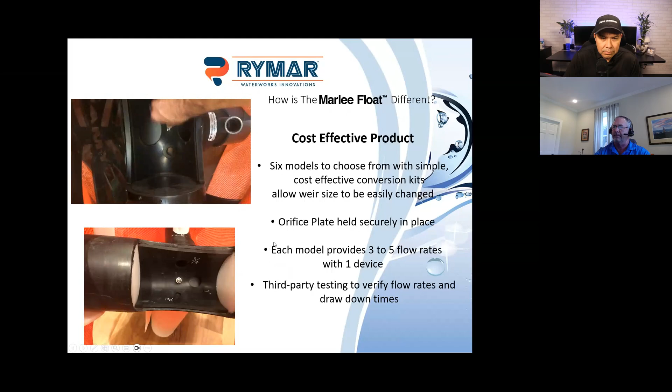Oops, missed one. Hopefully that will work.

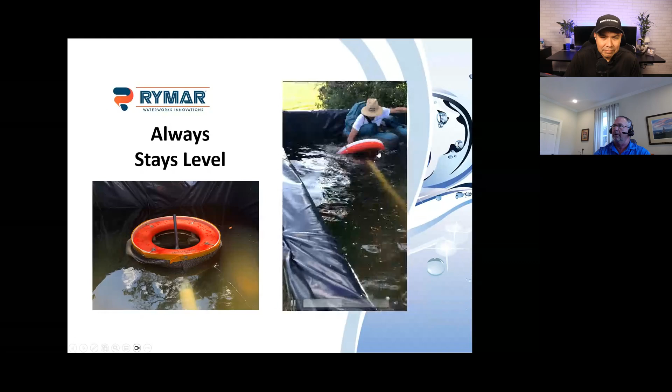One thing about our skimmer: when it originally came out back in 2013, it was a little different design. We changed that up back in 2020, so it always stays level. This is Aaron, our shop manager. He got in the pond here, our test tank, and just said, let's make sure this thing always floats correctly.

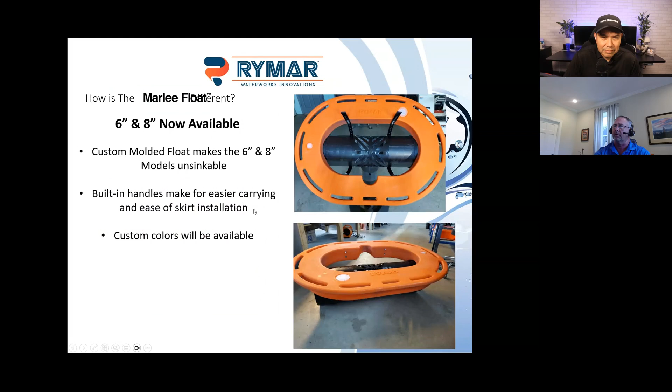We do have custom floats for our 6 and 8 inch. Now our 3 and 4 inch use something similar, making it easier to carry in the field. We have 6 different versions. Our 2 inch goes down to a 1/2 inch orifice, which is a trickle. We have 2 different 8 inch models: our standard 8 inch uses a 6 inch pipe, and our 8 inch with 8 inch pipe uses 8 inch pipe, giving a flow rate of almost 2 CFS, about double most other 8 inch skimmers on the market.

Wrapping up, I want to quickly mention we're now working with a company called Digital Site Box. They're based in South Carolina, have been there for coming up on a year now, and are starting to expand into other states.

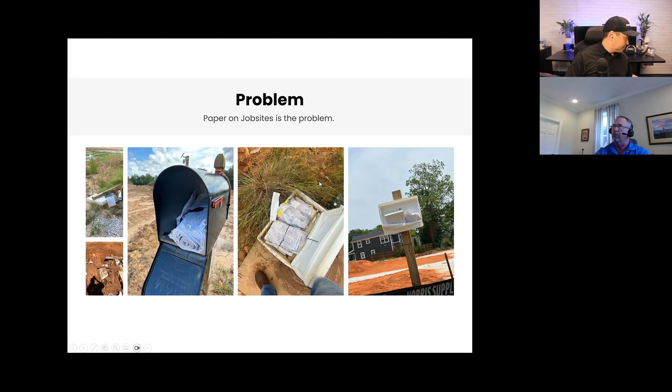This simple sign with a QR code is the alternative to the traditional job site box. We've all seen these. If you've been on a construction site, you've seen wet plans, wet inspections, missing inspections, not up-to-date plans, or just no box at all, knocked into something or disappeared. Or my favorite, the occasional wasp nest when you open one up and have to run away. Digital Site Box is a digital solution.

It's a simple website, so there's no software or apps to download. It puts all your projects in one place and includes a rainfall log. There are ways to secure certain folders if you need to keep it private, though most of it is designed to replace that job box so it's publicly available. It also has messaging and time stamping, so if you need to see who looked at something, it'll tell you who logged in and what they looked at. You can upload basically any type of document, and it's about 5 gigs of storage per project, which should easily hold most of your information.

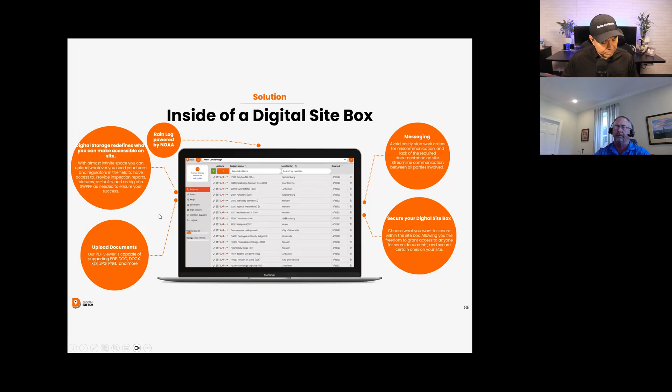It's free for municipal users, so if you've got folks with MS4s watching this, go in and create your free account. Any project set up in your area will automatically be added to your account. So if you're an inspector for the local city or county and you're like, we just had a big rain, I wonder how my site's held up, you don't have to drive to everyone, open the box, and check the inspection report. You can, from your office, pull every site up, check the latest inspection, and see which sites you need to prioritize for visits.

Cost is very competitive. Essentially it's $150 per site if you're under 50 sites. If you go over 50, it's $100 a site. Over 100, it's $75 a site. Even at $150 a site, that's far less than what you'd spend just getting the plans printed.